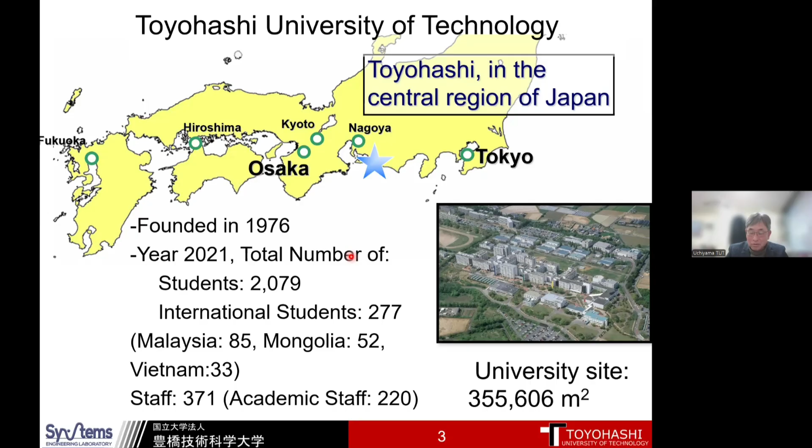We have some international collaborative education programs. I'm in charge of a double degree program for graduate school, master's program with University of Stuttgart. This program also now has a double degree program with Bandung Institute of Technology, Indonesia, and we have some program with Hasanuddin University in Indonesia.

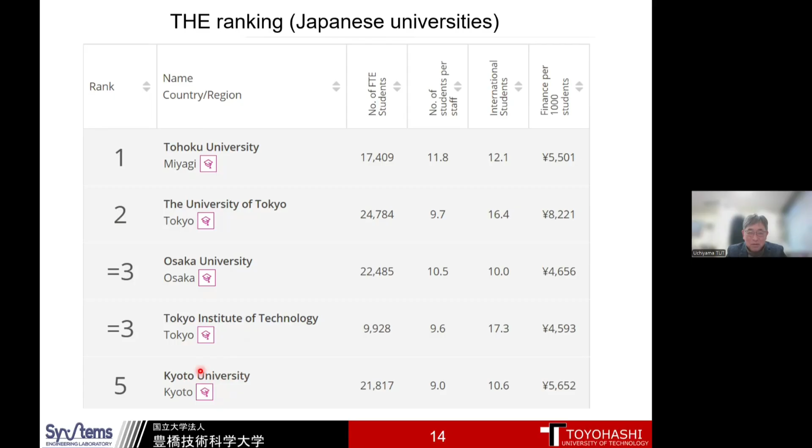I think you are interested in the rank of our university, Times Higher Education rank. Probably you want to know the level of our university. This includes only Japanese universities. University of Tokyo is the best university in Japan, and in this, a bit older data, Tohoku University is the best, then Osaka, Tokyo Tech, Kyoto University. Kyoto University is probably a name you know, the second university in Japan, I think. So we are around here, 36. Most national universities are around this level in Japan.

International students ratio, this column is a bit higher than other universities. Number of students is smaller than other universities.

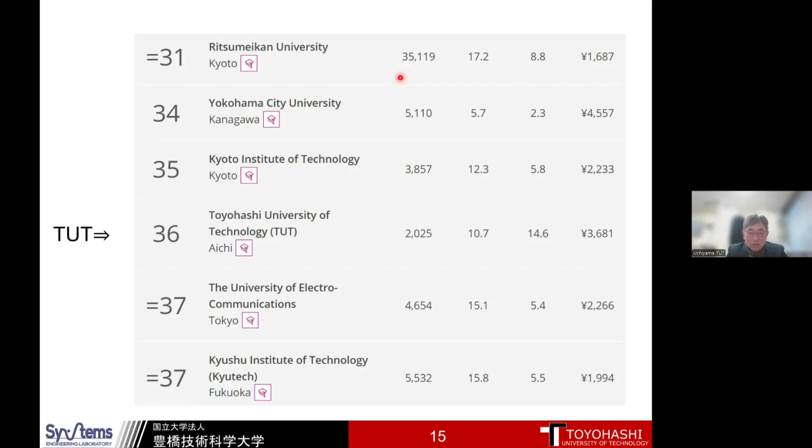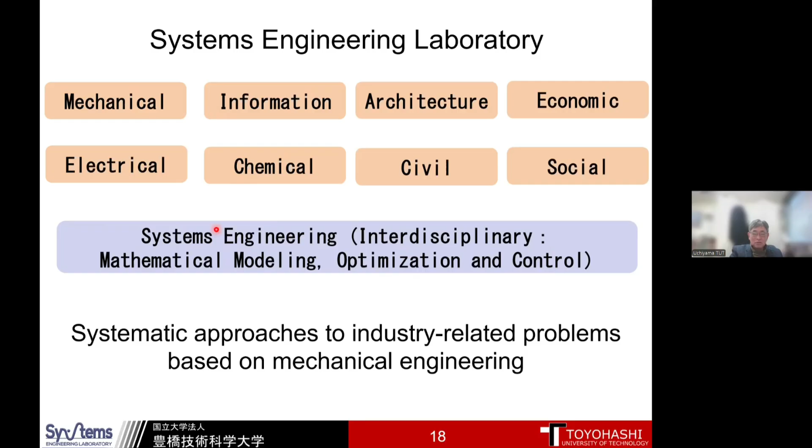So I'd like to briefly explain optimization, the concept of optimization. I think some of you studied this concept in lectures already. This is a very typical topic in optimization: the traveling salesman problem.

Salesmen are asked to visit all customers. This is an office, the start point is the office. If the salesman takes the closest order first - closest point here to the office, he visits here, and the next closest point here, then next here, the next one here - then he will take this route. So this is not optimal from the viewpoint of total distance, longer than this case. This is the optimal trajectory, optimal path. So this is called the traveling salesman problem.

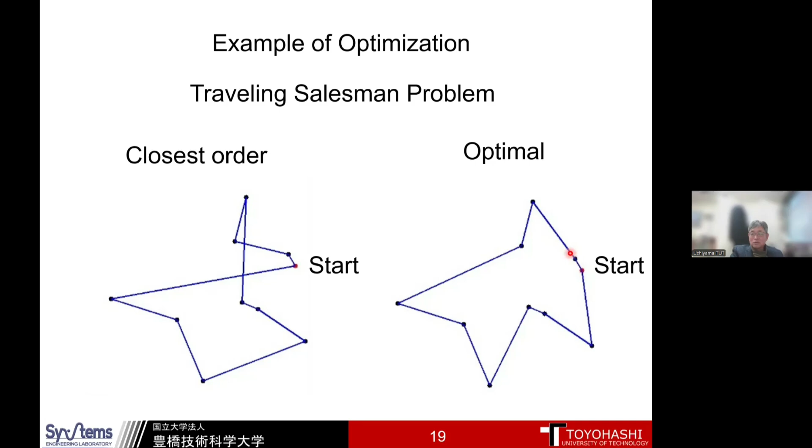The objective is to look for minimum, not only distance, but minimum cost, strategy. Sometimes this path, sometimes that kind of path - sometimes the time to be taken is considered as cost, or some budget costs are taken for the evaluation criterion. You understand? So this is a typical problem in optimization: looking for the best strategy for doing something.

So we next look closely at this problem. In an optimization problem, we have to define the objective function, which is to be minimized or maximized - or for example, to maximize the profit. In this case, because this is a traveling salesman problem, minimize total distance. And in an optimization problem, we have to define variables to be changed, which we can change - this is the visiting order, just visiting order.

And also we have to define constraints. In this case, visit all customers - you cannot skip some customers even if you dislike him or her, you have to visit him or her. This is a constraint. And you have to return to the office at last, finally - you cannot directly go home. First, you visit all customers, finally you have to return to the office and report, 'I visited all the customers,' something like that. Okay, this is the structure of optimization.

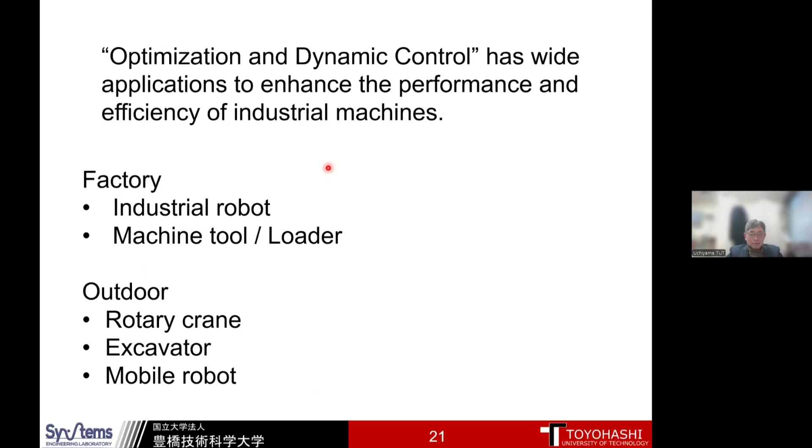Okay, if no questions, I'd like to go into our examples of optimization application to actual industry-related works in Japan. Optimization, you understand, has wide applications, and also dynamic control has wide applications in industry. So if no questions, I'm going to the next topic.

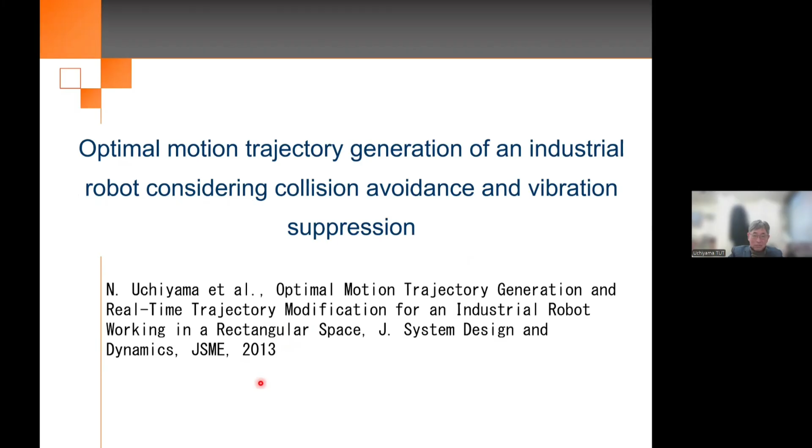Because semiconductor is a very precise electrical system, this must move in a dust-proof environment, a dust-proof clean room environment, right? Yeah, or in medical applications, sometimes this is needed.

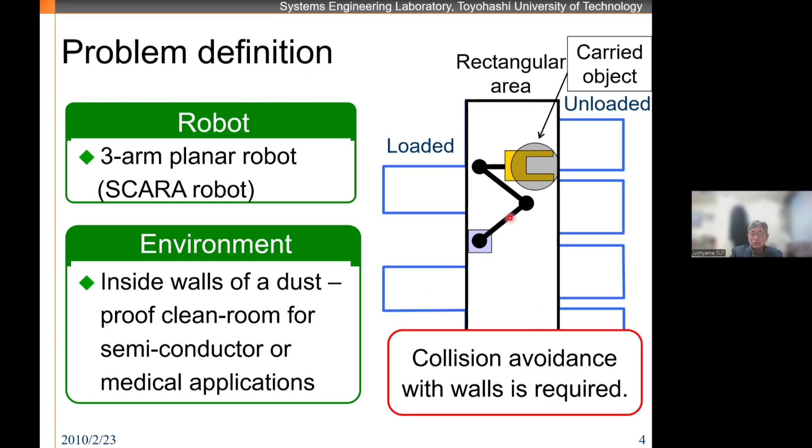The robot system is very competitive in this field. They want to reduce the motion time in order to increase the productivity. If the motion is slower than competitors, your robot is not accepted. Other companies' robots, they buy instead. So it's very competitive.

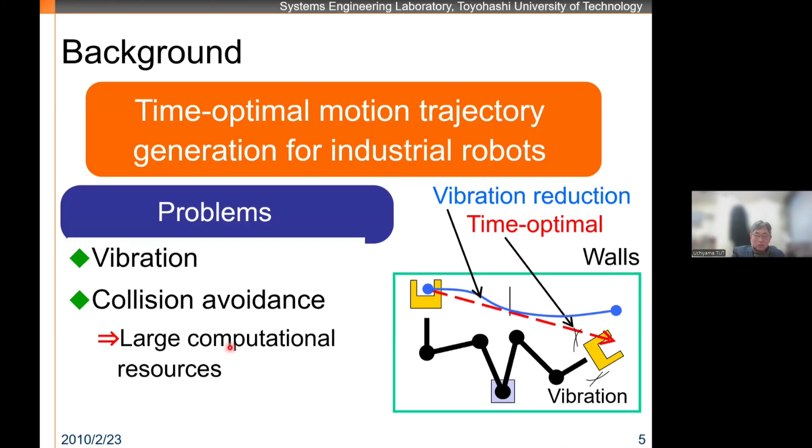And also, because this motion is very rapid, vibration occurs sometimes, right? Because this part has lightweight material, so vibration occurs. So we have to generate trajectory considering vibration. Not only time optimal, but also vibration must be considered, as well as collision avoidance. Normally this kind requires large computational resources in optimization, right?

So we propose, first we propose a simple dynamic model. This is a kind of dynamic control problem.

And for obstacle avoidance, from this figure, if all joints are in this rectangular area, X and Y values are between Y minimum to Y maximum, and X between X minimum to X maximum, then collision can be avoided with the walls. So this constraint is very simple, right? All the joints must be within this rectangular area.

And for considering the vibration, actually we measure vibration property by installing this accelerometer here at the end effector, at the gripper, kind of gripper, right? This is a kind of vacuum gripper. You see these folds, right?

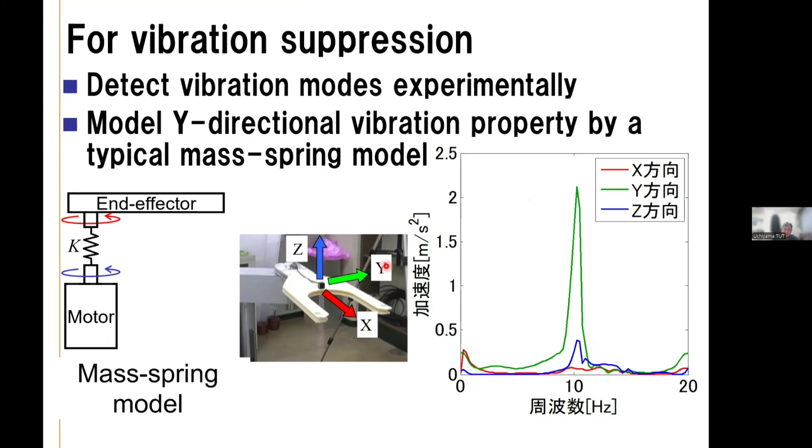And this is a natural frequency. Sorry, this is in Japanese. And here acceleration, so y-axis vibration is significant in this direction. And the z-axis and x-axis vibration are much smaller than y.

So we consider this dynamic model. This is just a simple mass spring model. Probably you studied this in physics, vibration. So spring constant over inertia of this end effector will be the square of angular natural frequency, right?

So this motor angle and effector angle difference will be the vibration. This is the assigned motor angle, the commanded motor angle, and end effector position will be different due to vibration. So this difference will be the vibration.

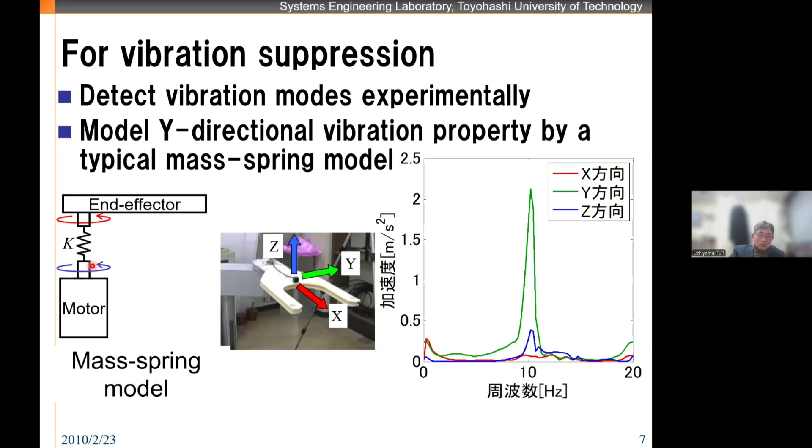So we formalize this problem using this simple model. And we consider Newton's equation.

And furthermore, we have to consider motor torque limitation. Each motor has a power limitation, of course. They use these motor powers as much as possible to reduce the motion time.

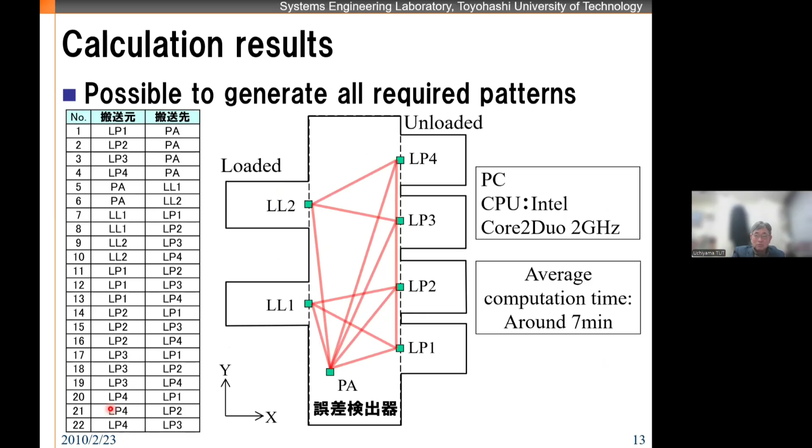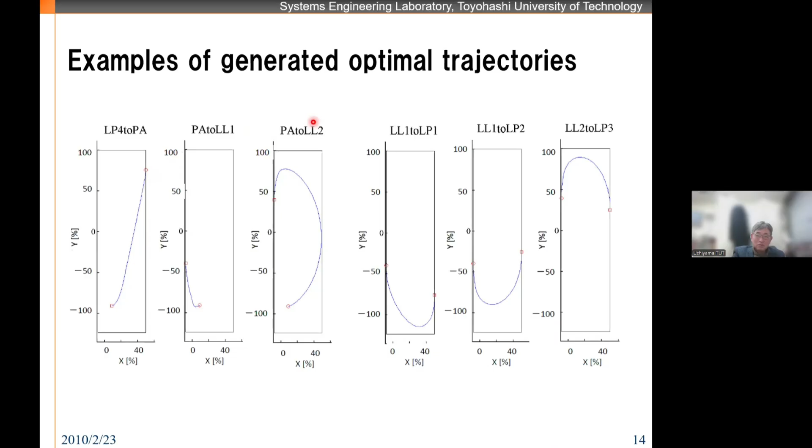And this was conducted around 10 years ago, but the company is still using this program for generating motion trajectories. You can imagine that if you generate this trajectory manually, considering motor torque, obstacle avoidance, and vibration, I think it's no longer possible - the company is still using this optimization program we developed.

We conducted experiments to verify effectiveness for all required transportation patterns. This is one example of industrial applications of optimization and dynamic control.

Do you have any questions? If not... Any question? Go ahead. Yes, you have a question. Yeah, I have a question, Prof. Uchiyama.

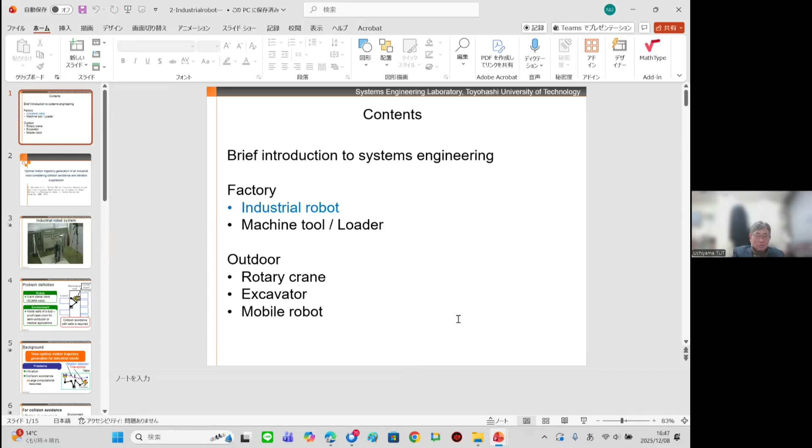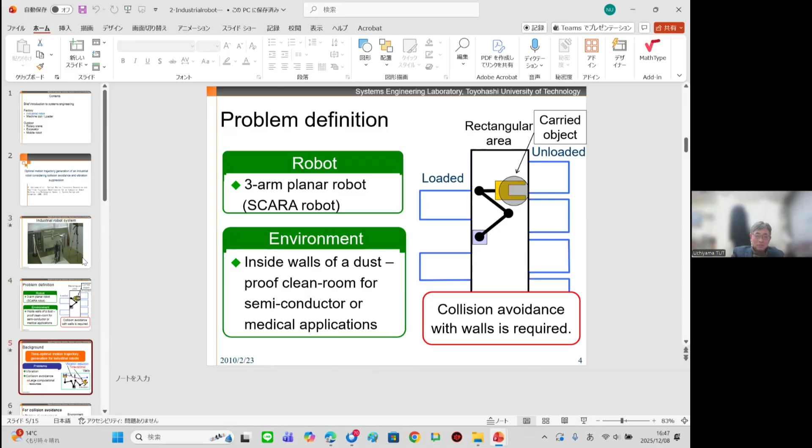In the video you shared before, I would like to ask how do you select the alpha parameter? Good question. It's actually a bit difficult, trial and error, because only a slight change is needed. We cannot predict this difference, so basically it's trial and error.

If you have only one parameter to be adjusted, I think trial and error is possible. If you have multiple parameters, trial and error is no longer possible. That's a good question. There's no particular reason basically - normally we leave one parameter for adjustment, for final adjustment in applications.

In controller design also, you have some gain remained to be tuned. That's because simulation and experiment are normally different, so we have to have some degree of freedom for tuning. So this is a kind of tuning parameter.

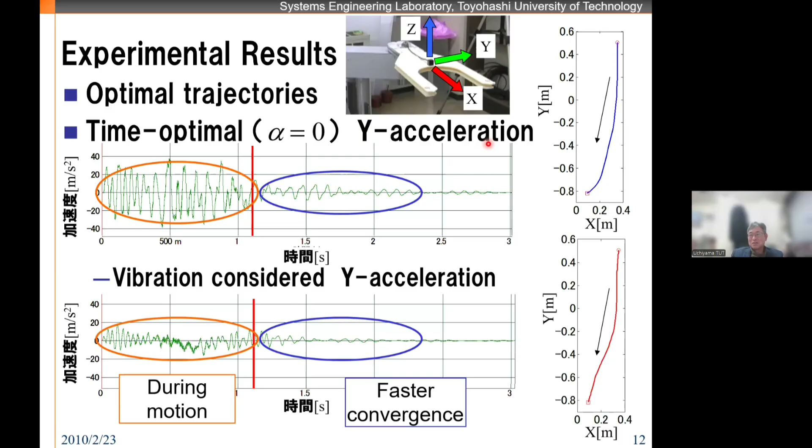Oh, okay, thank you. Thank you, I think it's a very good question. One key idea is normally we have one tuning parameter remained for implementation.

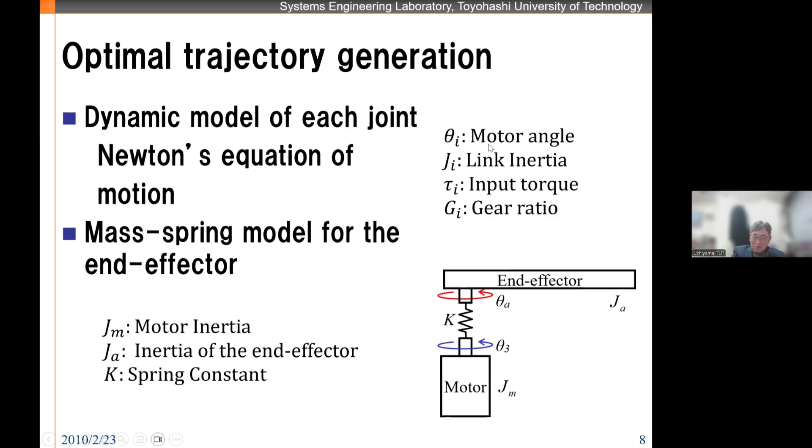Any other questions? Thank you. Then I would like to go to the next slide: vibration suppression and energy saving.

Still an industrial, factory problem. This is around 10 years ago also. But recently, companies request going to outdoor automation. Around 10 years ago, factory automation was a main topic for industry, but recently LiDAR and cameras have become more reliable and less costly.

So they are applying such sensors to outdoor automation problems. Later I'll explain this one. So next topic: machine tool and loader.

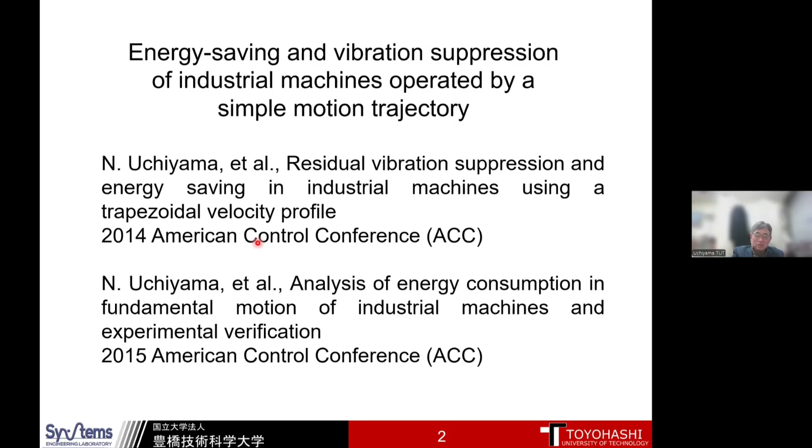The topic is energy saving and vibration suppression of industrial machines operated by a simple motion trajectory. This is a key point. Simple motion trajectory is easily applied to industrial machines. This was published in American Control Conference, one of the major conferences in the control area, around 10 years ago.

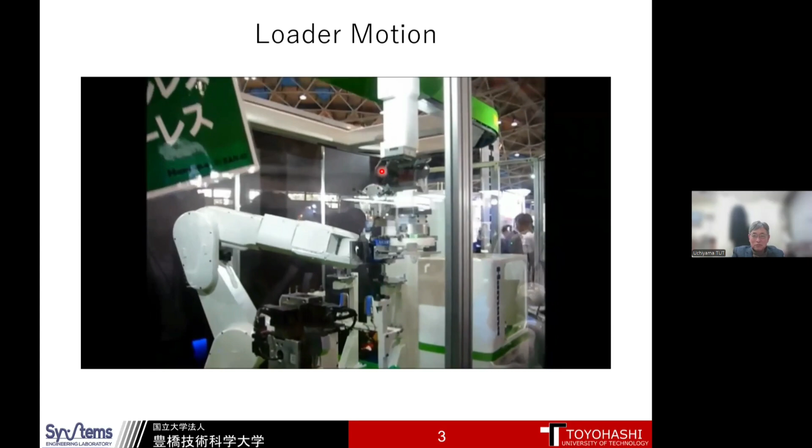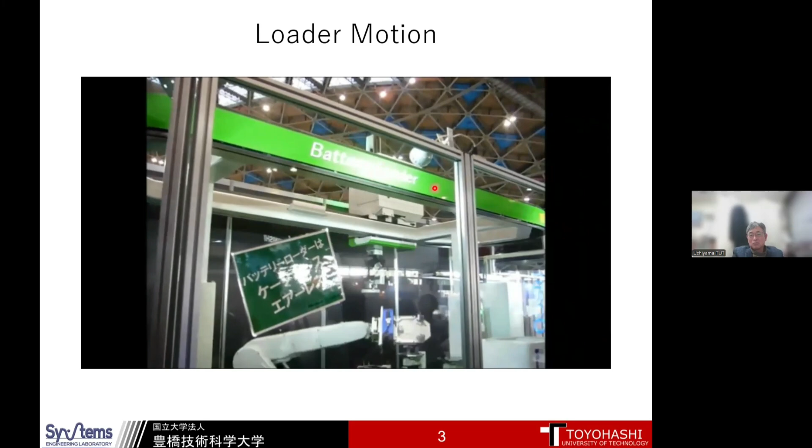This is a loader we developed in collaboration with a company. The name is battery loader. Normally a loader has a cable for charging power. Some loaders have, for example, a 50-meter long cable, so the cable will be damaged after about 3 years. They have to replace cables, because they have to pull cables back and forth. The cable gets damaged easily, so they decided to change cable to battery.

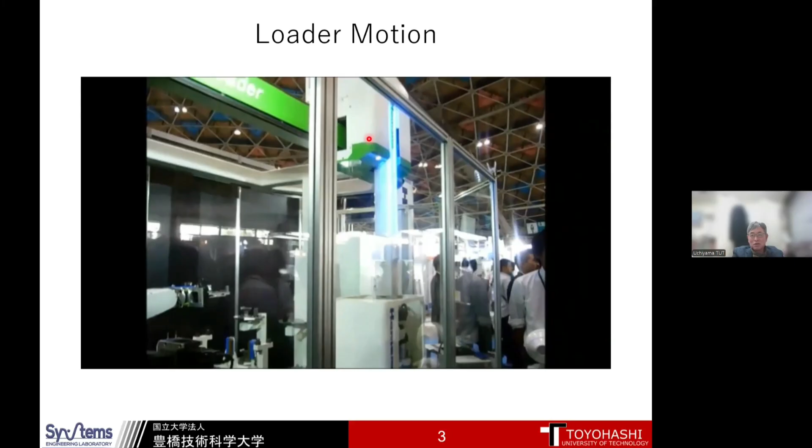Actually, a battery requires long charging time, so we use a capacitor for charging. Here's a capacitor, and when stopping, the capacitor is charged. When moving, energy is released and used for motion. There's electricity charging somewhere, and when stopping, the capacitor is charged. So we developed this system.

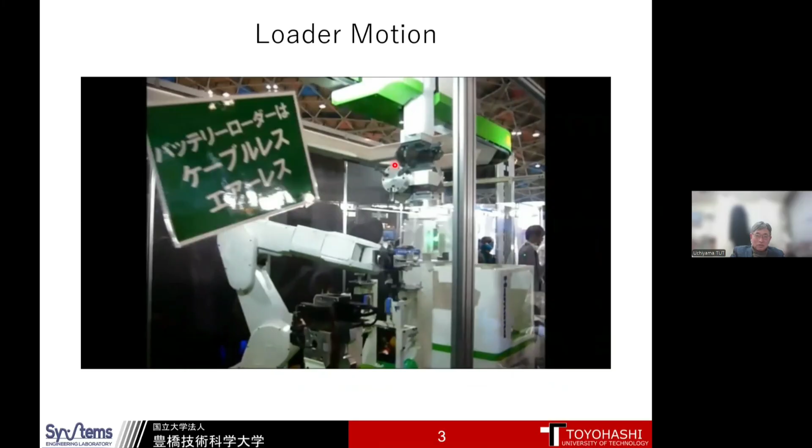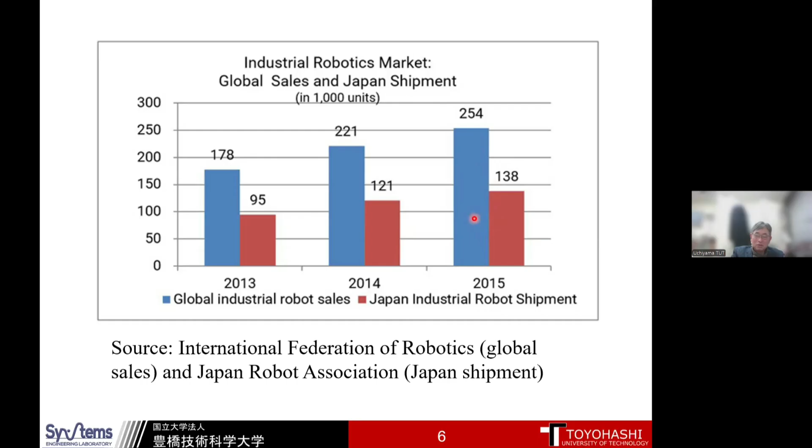Recently energy shortage and Earth environmental problems are becoming severe. I think Indonesia also has big heavy rain seasons compared to before, and in Japan also we are facing such big disasters, in particular heavy rain recently. So because we sold many products in the world, I think we are responsible for energy saving in these robots or machines. Sorry, this is also a bit old data.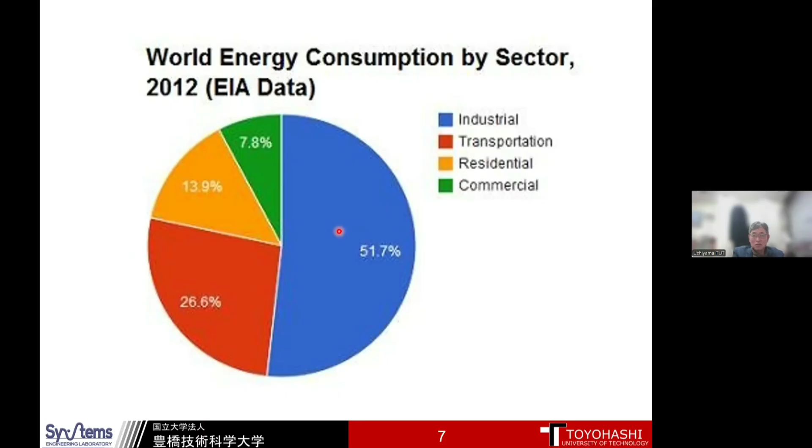World energy consumption by sector: industry occupies more than half, next transportation, residential, commercial. Transportation is not so high - some consider electric vehicles are needed, but industry has much higher consumption than transportation. And among industry, motors have the highest energy consumption. I thought that heat might be the highest, but motors are highest. The comment here: indeed, electric motors and the systems they drive are the largest single consumer of electric power.

Approximately 50% of total global energy consumption, and which generates big CO2. So because we sold many machines all over the world, we are responsible for this kind of problem, which is becoming a big issue recently. This is my motivation for this work. As I explained, we sold many machines and they are operated around the clock all over the world, night and day. So hence energy saving is required.

Many machines are already currently in use. They don't want to change hardware, right, because that's costly. So I thought that a control approach would be useful for implementation on these existing machines all over the world. And one more thing - in industry, feedback control is also difficult to change, because feedback control systems require sensors, and if you assign inappropriate gains, the system becomes unstable. Some industrial machines are not allowed to change controller gain because sometimes it's very dangerous - the system becomes unstable.

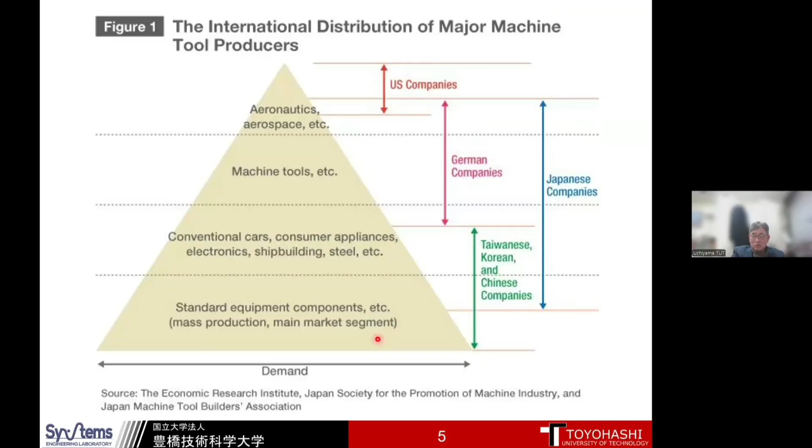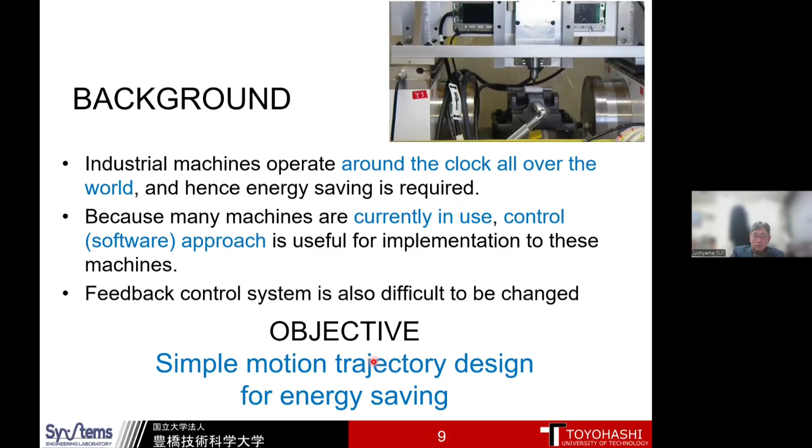Most industry machines are operated by, for example, Mitsubishi controller or other industrial controllers from companies in Japan. So they want to use inexpensive controllers, and sometimes these only allow trajectory for motion using a trapezoidal velocity profile. This includes acceleration, constant velocity, and deceleration, like vehicle motion on a highway: accelerate, constant, decelerate, stop, right?

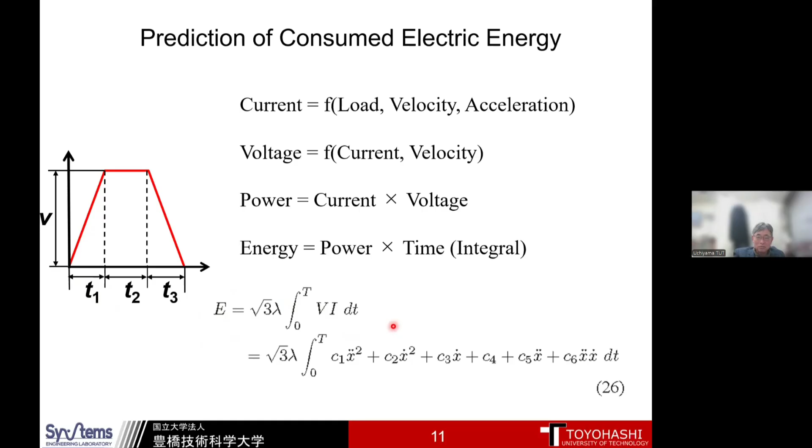Now you can understand the image of this calculation, and we apply this idea to these industrial machines.

We changed T1 in the experiment like this, from 0.05, 0.1 up to 0.6, with distance and time unchanged - only acceleration changed. This is the consumed energy for 3 trials, almost consistent, with the red line being the average of the 3 measurements. This is the theoretical optimal acceleration period, around 0.16 something, and it matches quite well with the experimental results.

You can see reduction of energy from here to here, and also from here to here - around 30% reduction, and from here, 10% reduction is achieved. So we can predict this 0.1 something, which provides minimum energy.

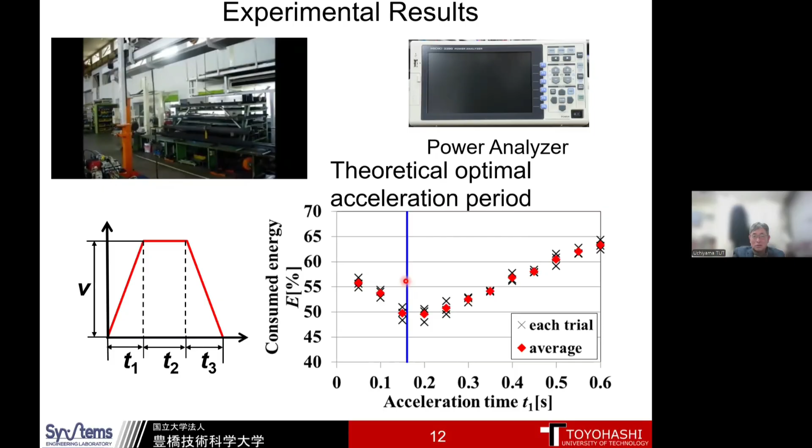Because this motion continues 24 hours a day, sometimes all over the world, this is a small magnitude - just 10% for only this machine. But if all countries apply this idea, just adjusting acceleration, then I think we can achieve significant energy reduction, which matters for our environmental problem.

We use this kind of analyzer for energy measurement. Next, we apply our idea to this industrial table motion, which is widely used all over the world, simple motion.

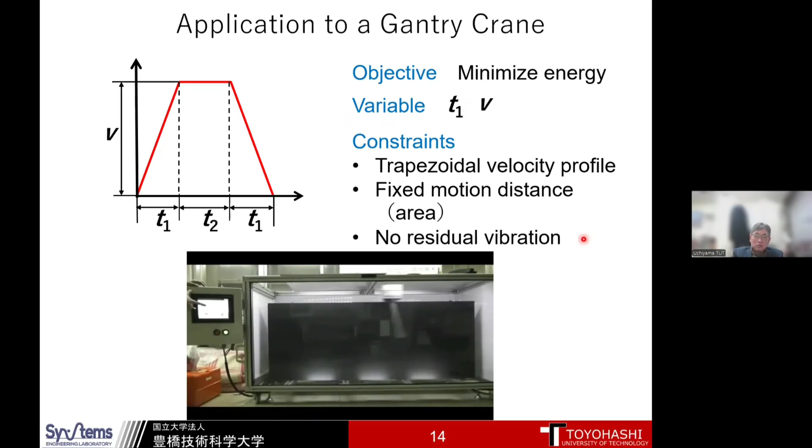The key idea is to consider the natural frequency of a pendulum. Probably you studied this in high school also. A small, short pendulum provides a small natural period, while a large pendulum requires a longer period, like for motion.

We found this property analytically and theoretically: if T1 plus T2, the second one is important, if T1 plus T2 is a multiple of the natural period, then this moves one time with the time T1 plus T2, and residual vibration completely suppresses.

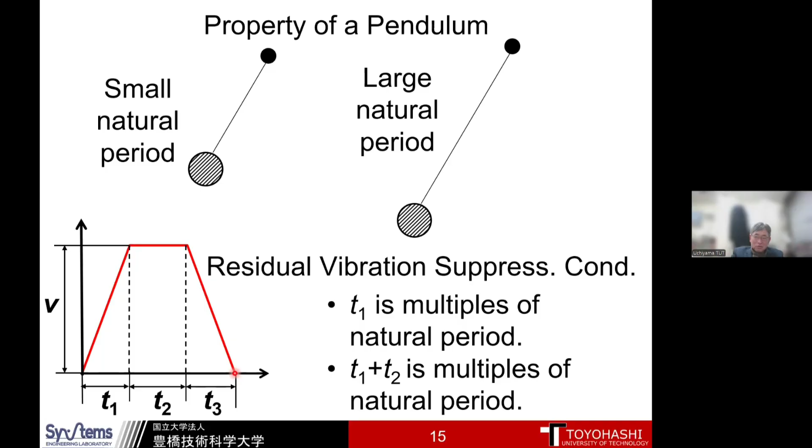If you are interested in it, you can check our paper in the American Control Conference. So, and we verify this idea.

So this is an unconsidered case. By applying this second property -- I'm sorry.

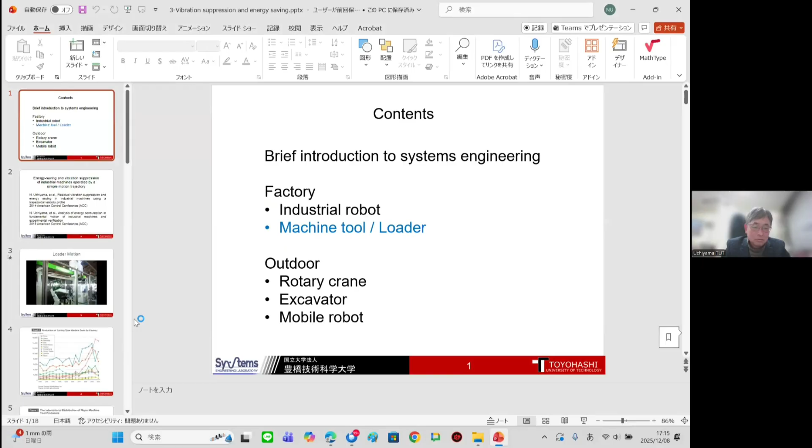PowerPoint stops for a moment. Sorry, moment. I should share the slide.

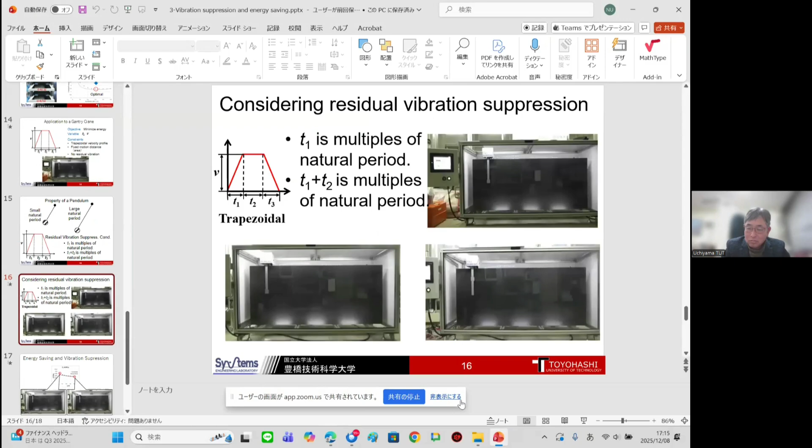Can you see my slide? Yeah, we can see your slide. Okay, sorry for the inconvenience.

By applying this second property, you see vibration completely suppressed. For the longer case, the center of gravity is at the end, so this is the longer pendulum case, and then the short pendulum case, this motion.

So only by using this trapezoidal velocity profile, by just adjusting T1 plus T2, we can achieve this complete residual vibration suppression.

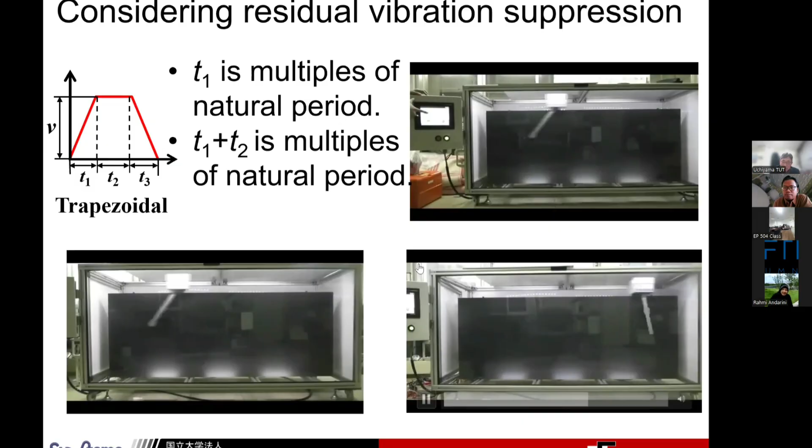Because we can predict energy consumed, if you use this rapid velocity motion, you consume this energy. If you want to reduce energy, you have to reduce velocity like this one, but vibration can still be suppressed.

So this kind of design can be possible by considering both energy saving and vibration. You can adjust velocity for reducing energy. There's a trade-off between velocity and energy.

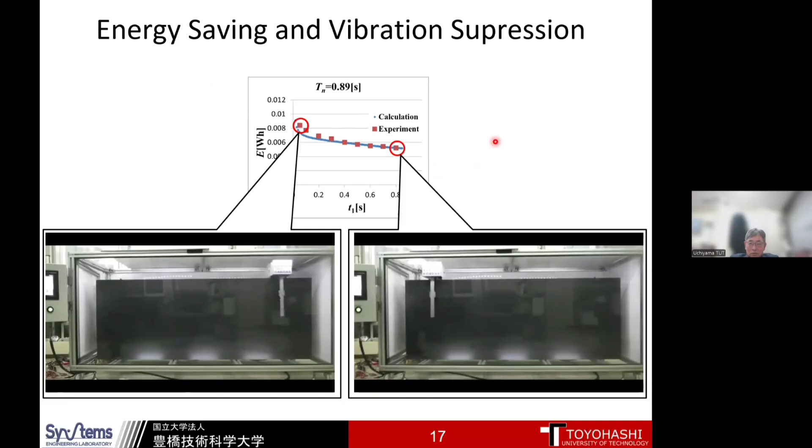The important point is that we consider only simple motion trajectory, which can be used all over the world in industries, and only the adjustment of acceleration time is needed. So this is easily applicable to any field in industry. We showed the validity by experiment.

Okay, this is the second topic. Any questions? Any question on the floor, please, students? Okay, seems not.

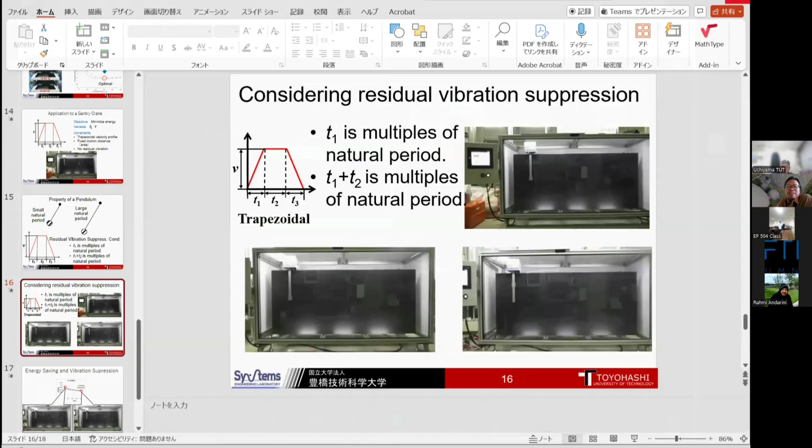Okay, so next, I'd like to go next. Sorry Professor Uchiyama, since our student has a question about the previous topic. Thank you. Very welcome.

Sir, I want to ask: since many machines cannot change their hardware or feedback controls, what is the biggest challenge when applying energy-saving trajectories to other systems?

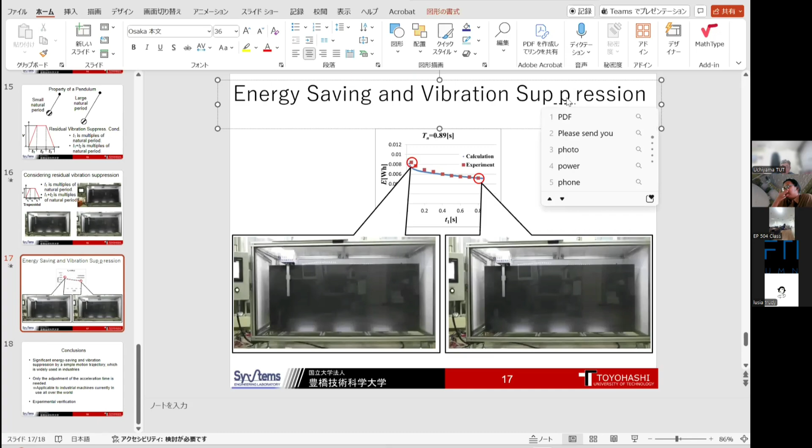Because you mean the challenge in our method or the challenge in feedback control?

Our method is, I think, easy to implement. Just change the acceleration, right? For example, this one, just change T1.

Then, sorry, I didn't share the slide. Sorry, I didn't share the slide. I cannot catch your question.

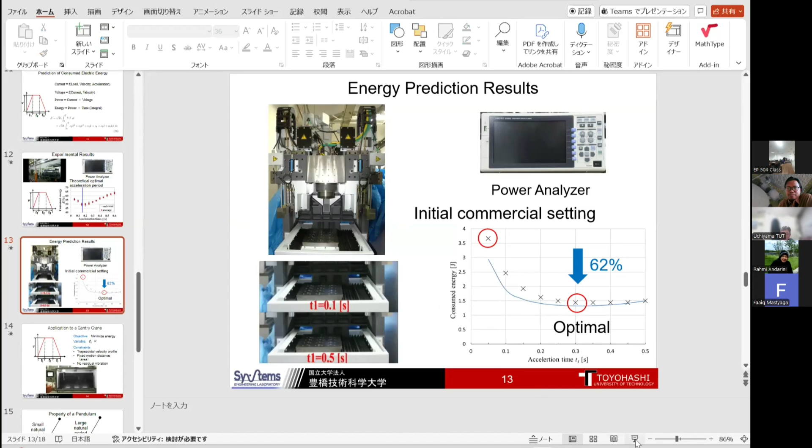In our method, it's very easy to implement, just changing the acceleration. For example, this one, just changing T1. This is not so difficult. Then we can achieve a big reduction of energy, right?

But if you change feedback control, for some companies the stability of the system will be changed. You studied control theory or control engineering; stability should be analyzed if you change feedback gain or something. For this local company in our area, there are no such engineers for tuning the controller.

They just change the motion profile, right? In most cases, if you consider big companies like Fanuc or Yaskawa in Japan, there are many control engineers. But local companies are kind of just users of this machine, like this loader. They can only change the trajectory profile. That's the challenge, right? Feedback control is a challenge for them. Is that the answer to your question?

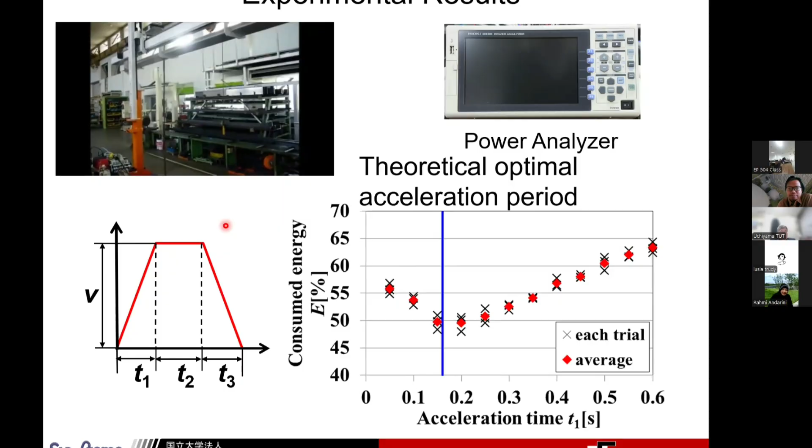Yes, sir. Thank you. Thank you for the questions. Okay, so can I continue? Yes, you can continue. Thank you. So I think I have 2 hours, right?

Just the next topic - which one is interesting to you? So, rotary crane problem is next. I think you can see my slide, right? Okay.

This was published in this journal. As I mentioned, we started a collaborative laboratory with Kobelco Construction Machinery. In this laboratory, we can hire, for example, 3 researchers - PhD postdocs or something. So this is a relatively big project in Japan.

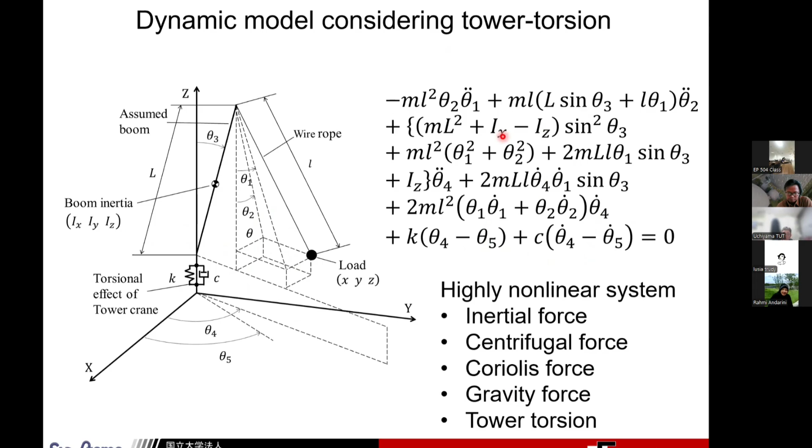Then next we apply this optimization. Again, we apply this velocity - trapezoidal velocity profile. In this case we use a kind of sine function for acceleration and deceleration. This is applied to this motion. And the total motion time should be minimized - this one.

And load sway should be less than this value. Also velocity should be less than this value - they are constraints. Also this tower torsion, theta 4 minus theta 5, should be less than this value. These are constraints. Also this dynamics is a constraint - they have to follow this dynamics, the motion must follow this dynamics. This is a constraint.

And this is the objective function. The variables are this one, and this max - 4 variables.

And also, because we do experiments with this machine, it's difficult to directly apply our idea to it. Actually we did apply it, but in the first stage it was regarded as sometimes dangerous. If big vibration occurs, they said this tower will be broken, or this boom will be very much damaged. So this is a bit of a serious experiment.

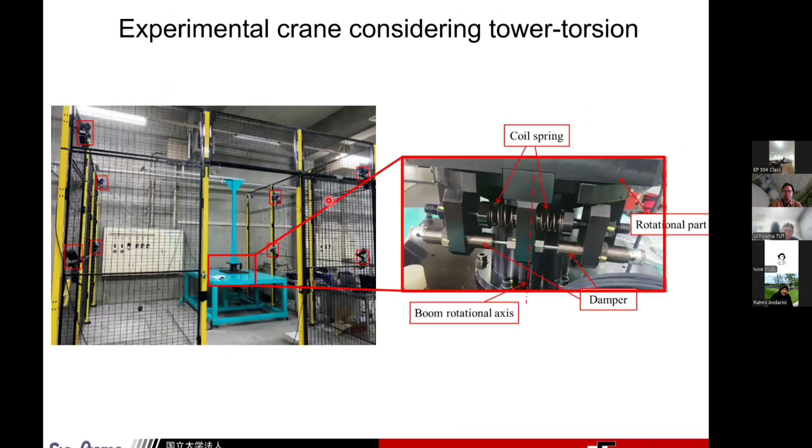We control only rotation, boom rotation, but we have to control both load sways. That's a bit difficult problem, right? Actually, by this boom rotation, radial load sway is linearly uncontrollable. This is controlled by centrifugal force only, or Coriolis force, right? So this is a bit difficult problem.

There are two variables, theta 1 and theta 2 itself, three variables to be controlled, and also tower torsion should be reduced only by this one simple motion. If you are a control engineer, you understand the difficulty. We can control only one variable, but we have to suppress tower torsion and load sway, and this radial direction is linearly uncontrollable. This is achieved by optimization.

So we conducted a similar experiment in previous years. We compared this idea and the proposed idea. Actually, the previous one doesn't consider tower torsion, so by considering tower torsion, we obtain much better performance.

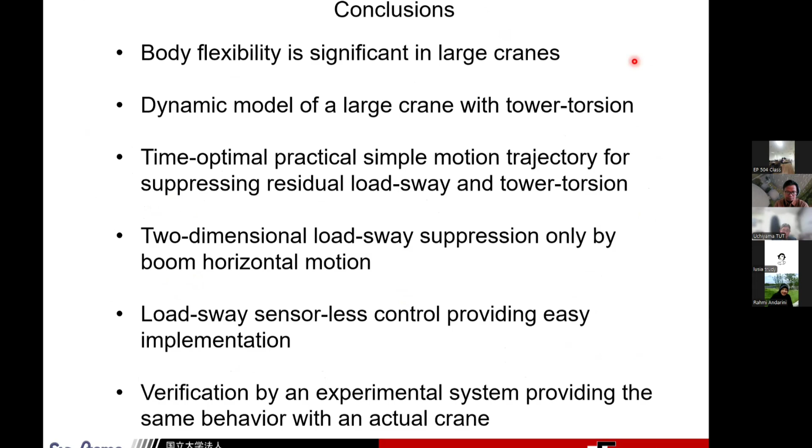Okay, that's it for the in-plane control. Any question? Okay, no question.

No question, okay. Yeah, so I'd like to explain. Can I continue? Yes, you can continue, but actually I have one question about the previous part. Please, thank you.

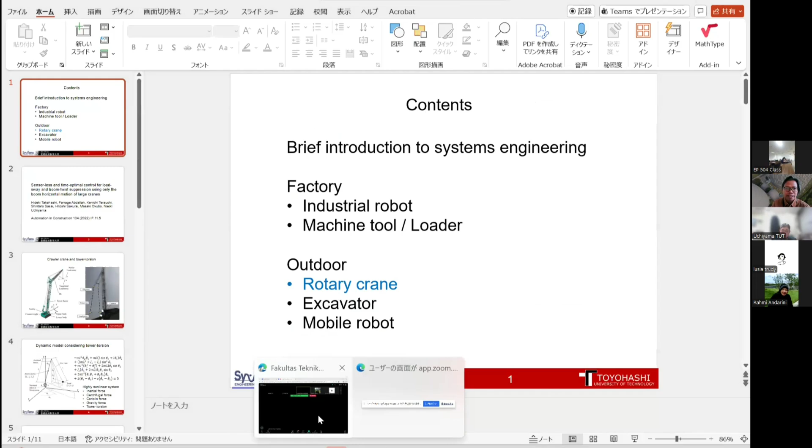Is there any limitation on how large the load sway can be in your experiment? Limitation, yeah, how large? How large can the load sway angle be for the horizontal motion only?

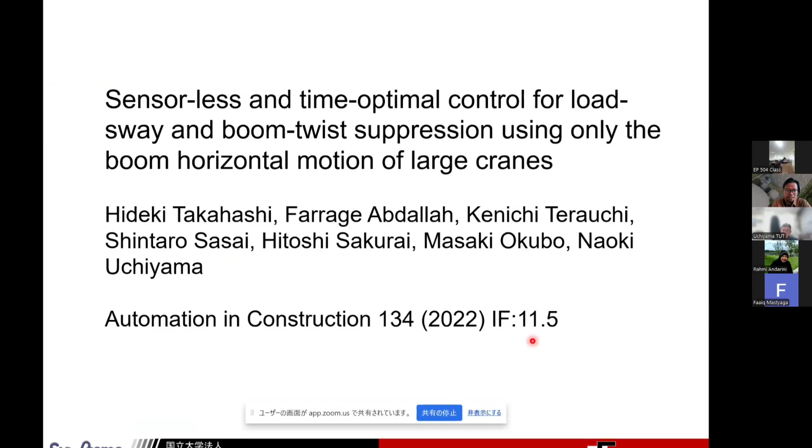Yeah, I think theoretically, you can see my slide, right? Theoretically I cannot say how large it is, but experimentally we obtained this result, right? This is in degrees.

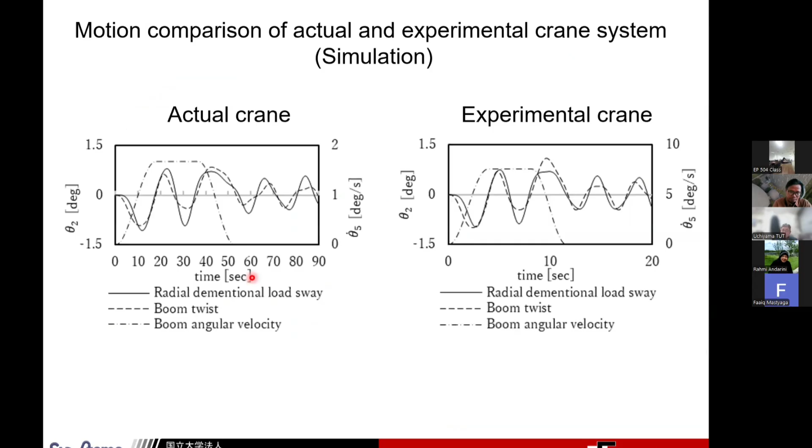In an actual crane, for example used at a construction site, they bring a 2-ton or 3-ton load and move it up to the construction building. At the destination, operators are receiving the load, so if load sway of, for example, 1 meter occurs, it's very dangerous for operators. Imagine that, because it's 2 or 3 tons, like a vehicle.

A vehicle moving 1 meter, and at the construction site there's no space to escape inside the building under construction. So the operator might get very angry, right? That's very dangerous. So a 1 meter load sway is not allowed. So this is a limit. Of course this is scaled, but this load sway is the limit allowed for safety.

So this is achieved by this control. Is that an answer to your question, how big the load sway allowed can be? So this limit is constrained by the actual on-site problem. 1 meter is scaled to this angle in this small experimental system.

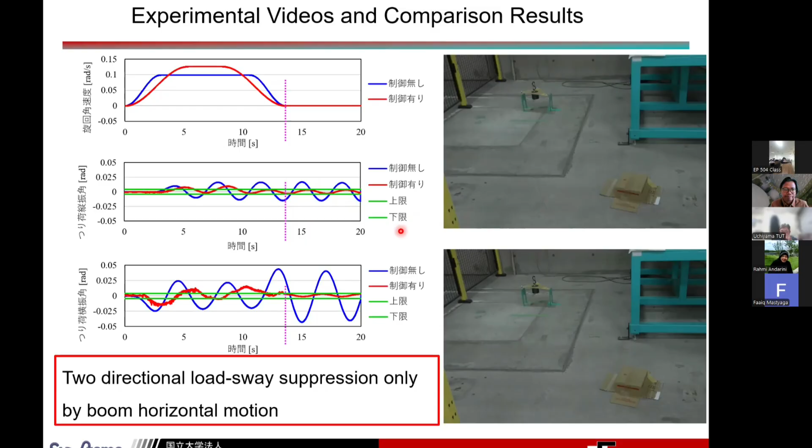Is it okay? Okay, thank you, sensei. Okay, thank you, thank you very much. So we consider the real problem for the problem setting.

I think because time is limited, this is the final topic today. Next is the excavation problem. I cannot go to the mobile robot because time is limited, I'm sorry about that. Excavation automation—this was also presented at this conference, probably the IES conference.

This year held at Surabaya, Indonesia. Yeah, we know that conference in Surabaya. We have a good collaboration with PENS also. EPIS, you know, it's kind of the National College of Technology. Don't you know EPIS? Is that Polytechnic? Yes, Polytechnic. Okay, Surabaya. Yeah, we know that Polytechnic. Yeah, this is held at that Polytechnic, Surabaya.

Anyway, in recycle center, this kind of motion continued. As I mentioned, recent years, outdoor automation is highly requested in many companies. Compared to indoor, outdoor experiments are very hard for us.

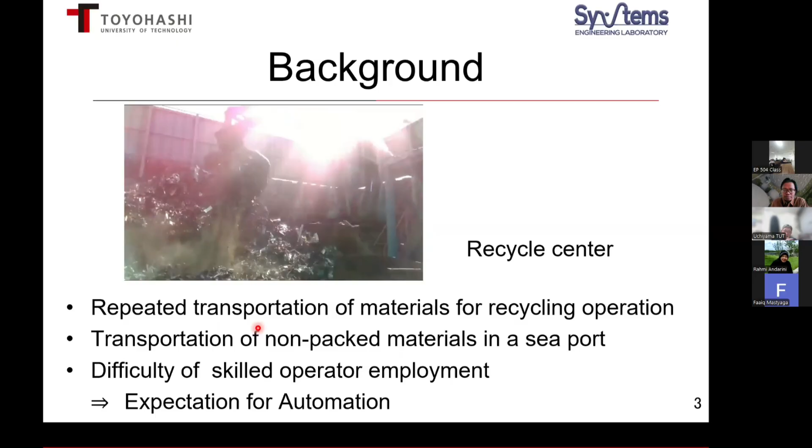For example, in recycle center, operator moves this recycled material into belt conveyor for selection whole day. Also in seaport, non-packed materials, for example coming from China, must be transported to land in a very short time at the seaport. Operators are very much rushed for this transportation of non-packed material to the land side, because if you take longer time, you need to pay more money for parking the ship at the seaport. So this is highly requested.

Also recently we are facing the population shortage, and we are becoming a very much elderly society. Skilled operator employment is very difficult. So automation is requested.

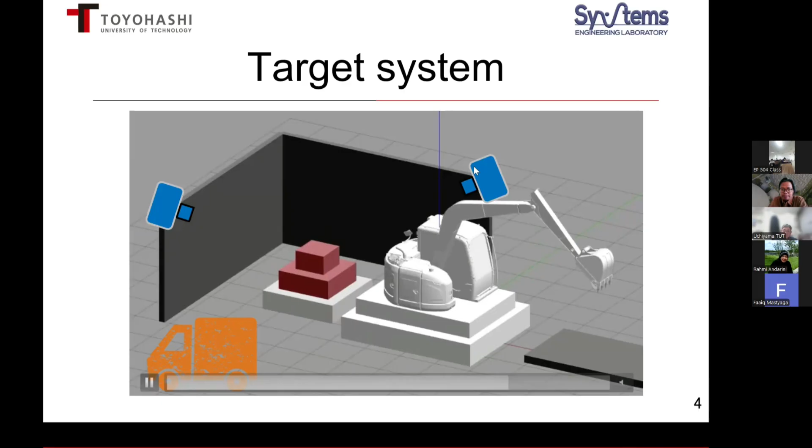So this is our target system. A truck brings this kind of material, and the excavator automatically takes it, moves it to belt conveyor, by detecting with these kinds of cameras. There are two cameras here, and this is our target. Then this can be automated.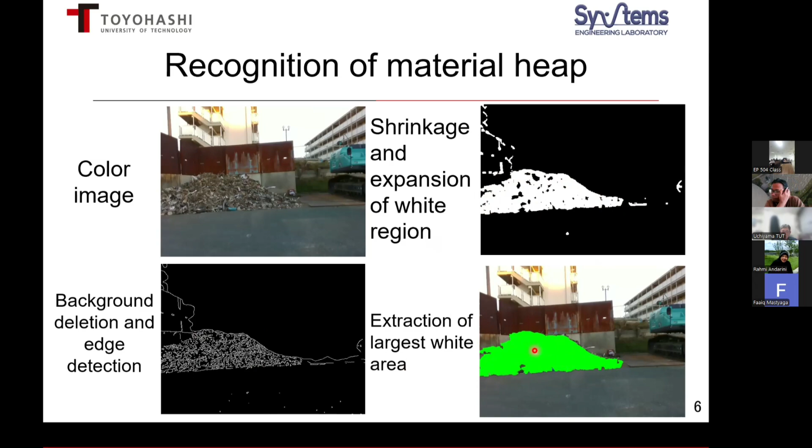Next topic is optimize grasping position. First I'll show the result of detection of edges. Even though they apply shower for saving the dust, and we can see sunlight, under this environment material area detection is successful, like this one, in real time.

Next step is to select the preferable or best area for transportation. The optimization of grasping position is the next topic.

We divide this area into cells, and we assign a score to each area. For example, the height is important - a certain level of height is important for grasping, this area cannot be grasped. Also distance to excavator is a criterion, and flat area is better. It's not sure, but the inclination of this area can also be a criterion. Then by weighting them, we can select the best position for grasping.

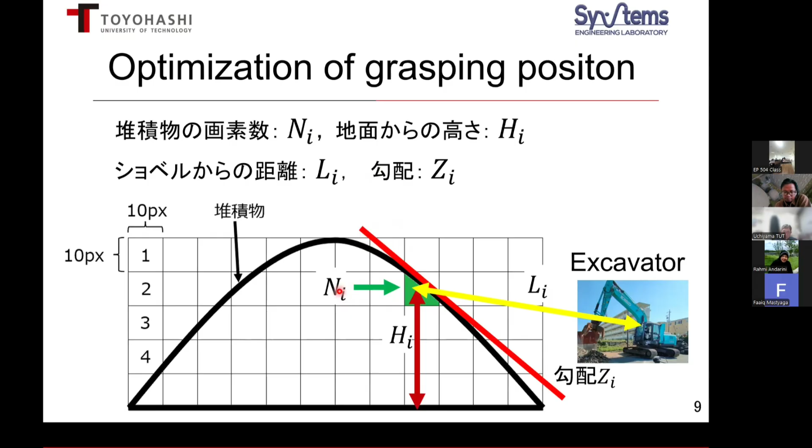So this is an example of optimal positions. If you weight height more, this position is selected. If you weight distance to excavator more, then the closest position is selected, but it's impossible to grasp. By considering the trade-off between distance and height, this position is selected for optimal grasping position - this looks appropriate for grasping. This is an image of the optimization.

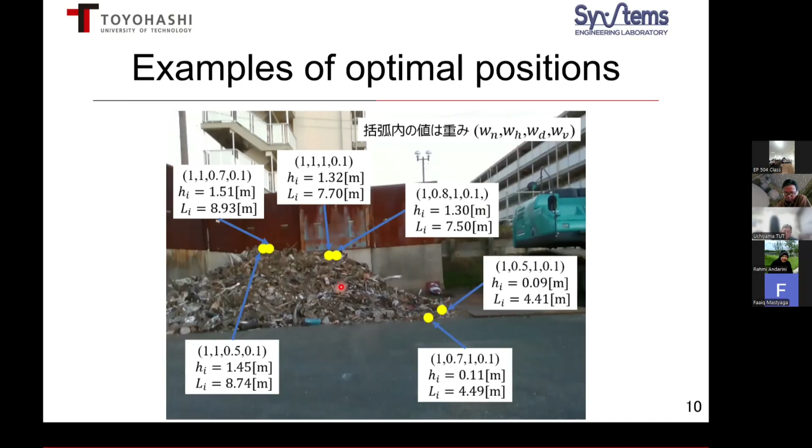So this camera detects this area and we calculate the optimal position. This data is sent to the PC in the excavator, and the excavator now knows which position is the best position. In order to move to here, we have to calculate inverse kinematics, meaning from this position we calculate wrist angle, elbow angle, shoulder angle, and waist angle.

They are calculated automatically by the Python program. Next step, we now know the joint angles, and we have to control the hydraulic system to that angle. This is not an electric motor, it's a hydraulic actuator, so we have to consider a nonlinear controller for this. This is also written by Python program by our student.

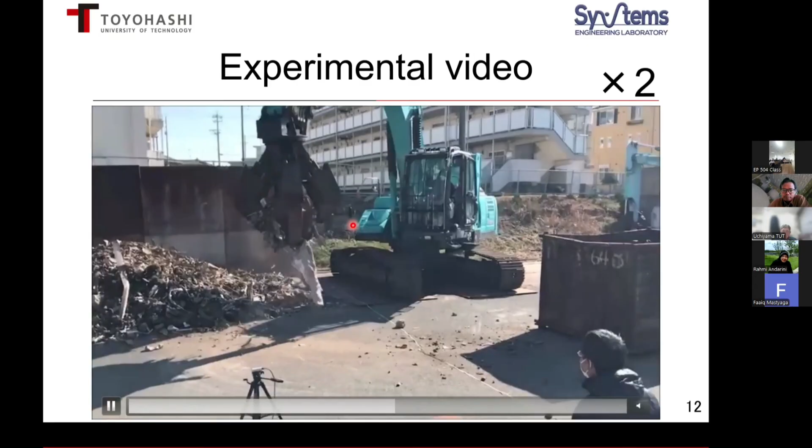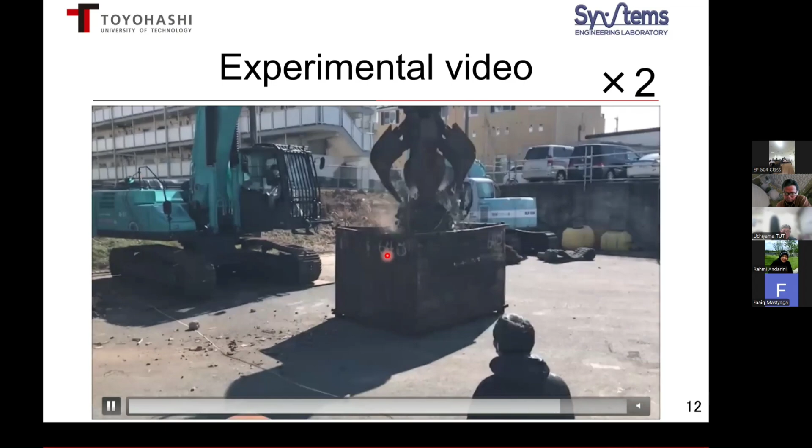Because this is the first experiment, control is not good - it stops here, overshoots, and returns to desired position, then successfully moved to this container. So we successfully conducted this kind of first experiment. I'll show you this again - camera, this is also overshoot here, but it grasps it. If it moves, the overshoot is big, this hits the wall. This is a bit dangerous experiment.

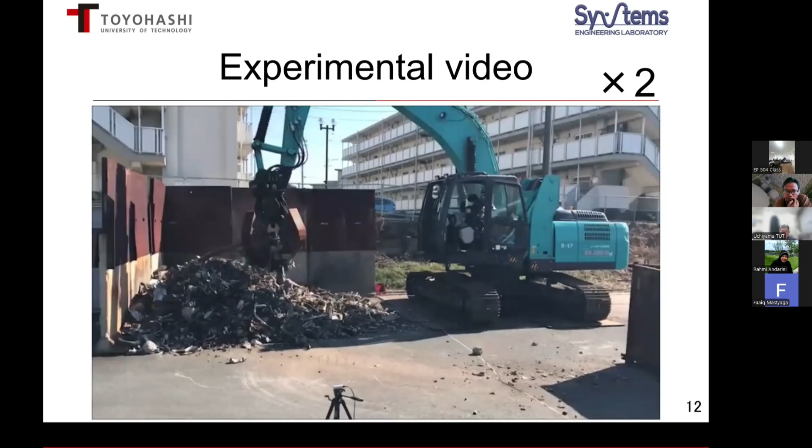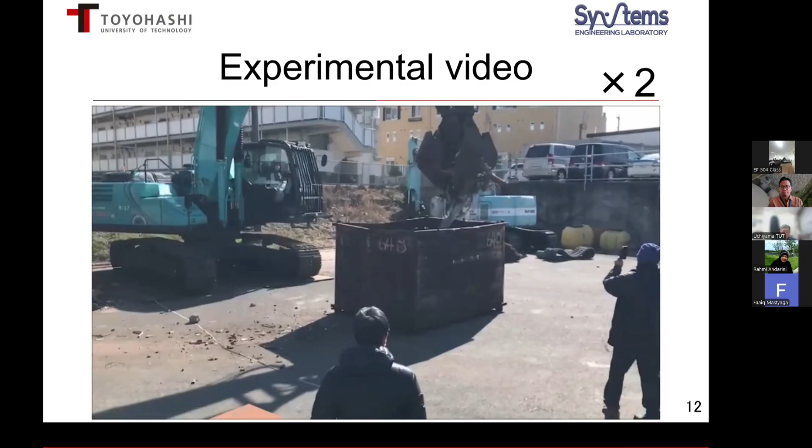So outdoor experiment is much more, in my view, much more difficult than indoor experiment. Also, this image suffers from sunlight sometimes. And this day we have heavy wind, so motion suffered from heavy wind sometimes. Many disturbances.

Okay, so this is another example of the automation of outdoor industrial system. We have to consider many things for automation, not only visual recognition, but also grasping, position optimization, inverse kinematic calculation, hydraulic controller design.

Yeah, they're very challenging. But I think the automation of this kind of work can be useful not only for industries but also for our human activities. Because Japan is facing the elderly society, so this kind of automation is highly required in many fields.

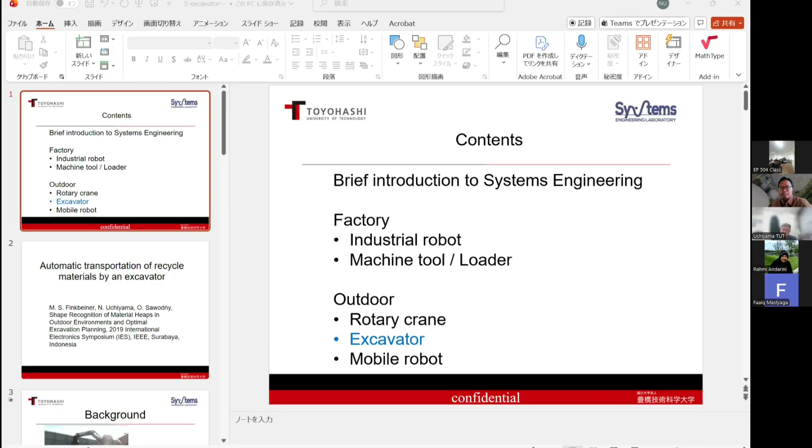My question is, have you also done experiments with equipment using thermal, for example, thermal equipment? Thermal equipment, sorry, I cannot understand. Such as boiler, maybe. A boiler, sorry, I have no experience with such kind of equipment.

You mean thermal equipment? But we have a professor, because I'm in mechanical engineering, we have a professor regarding such topic. If you are interested in it, I can introduce a professor to you.

Yes, but it's not the control field, he's just doing thermal kind of scientific research. Yes, because in Indonesia currently energy is also an important issue, and most industries use thermal equipment like boiler or pump or compressed air, and this equipment consumes energy significantly in industry.

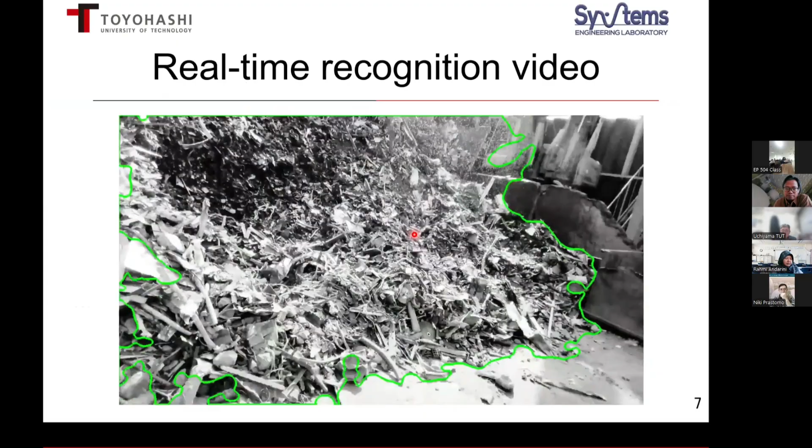Yeah, that's also a good question. You mean this RGBD camera, right? Actually, we conducted this, can you see the video? You can see the video of detection, right? This is a result of detection.

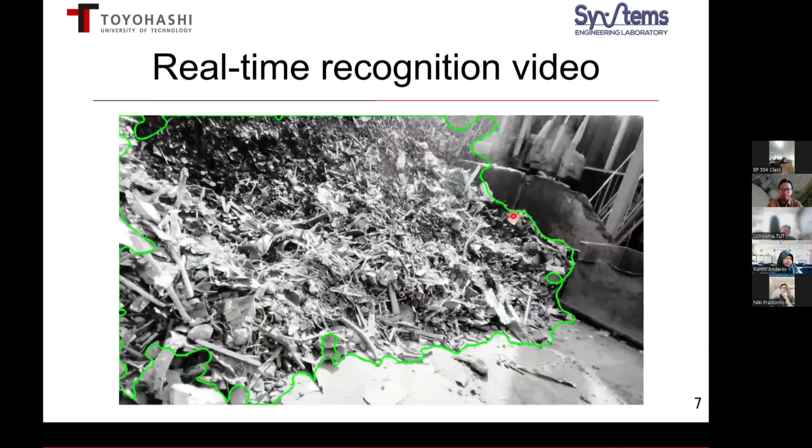Yeah, for practical implementation, I think this is sufficient, right? Even with this shower for suppressing dust, this is still working. But as I mentioned, I didn't check the relation between the precision and the lighting condition, lighting effect, something. That's a good direction, I think, for the next step.

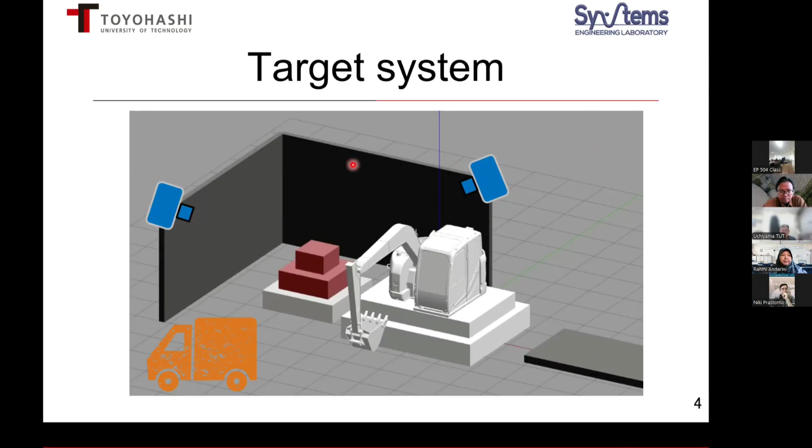My idea is to use multiple cameras, because sunlight comes from this direction, like this kind of multiple cameras. Then even if sunlight comes from this direction, this can detect the object, right? When sunrise and when sunset, we use this camera. Because the camera itself is not so expensive, around $500 something, so we can use multiple cameras for improving the precision.